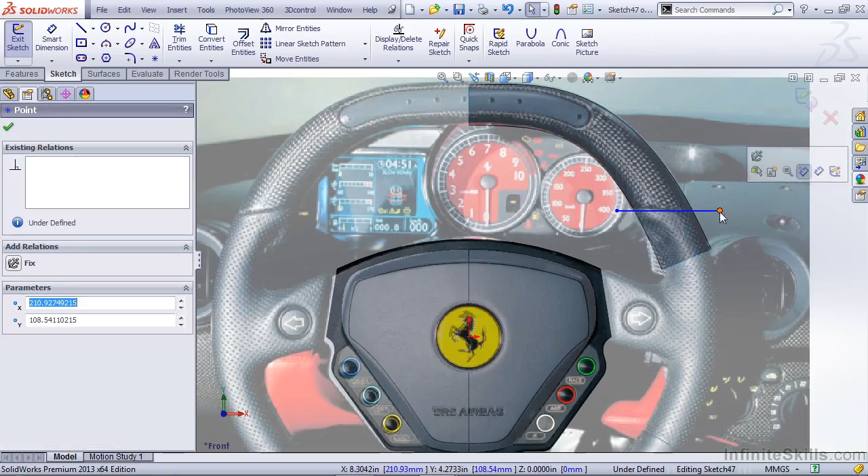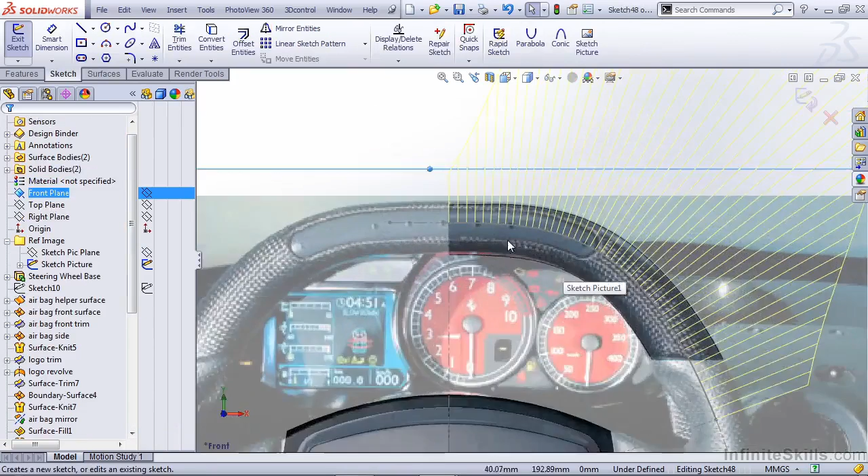Go to my Surfaces tab and use my Trim Surface to remove the excess portion of our loft that we do not need. The next thing I want to do is expand our loft and show the centerline sketch that was used to create that loft. On our front plane again, we're going to start a new sketch. What we'd like to do is create the border for our tachometer section.

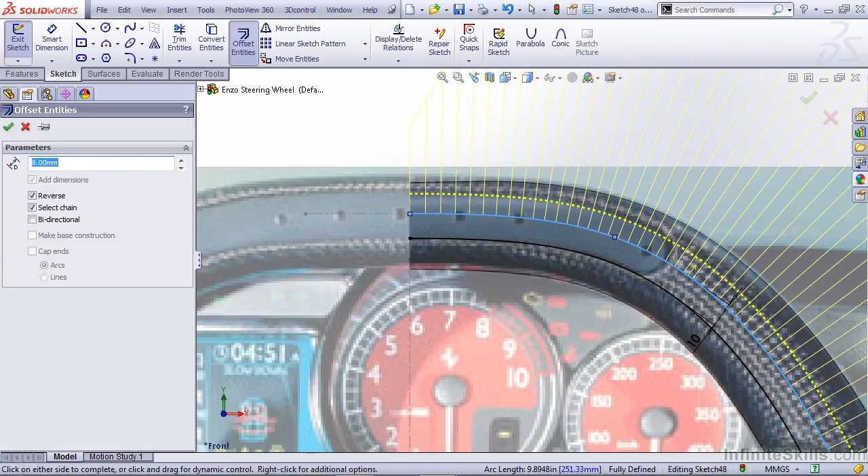I'm going to select the center line and use an offset. Looks like 10 millimeters is going to get us pretty close to where it's shown in our sketch picture. I'm going to select it again and offset it in the other direction. Now 10 millimeters is going to get us a little too close to the upper edge, so I'm actually going to use 8.

The next thing I like to do is use a straight line going between both sections, fix it in place, then use my trim tool to remove any unwanted sections. I like to use power trim. It allows me to just drag past and remove the unwanted section of our offset. Next, I want to convert that straight line to construction and then add a 3-point spline starting at each section and snapping to our centerline parameter for our loft.

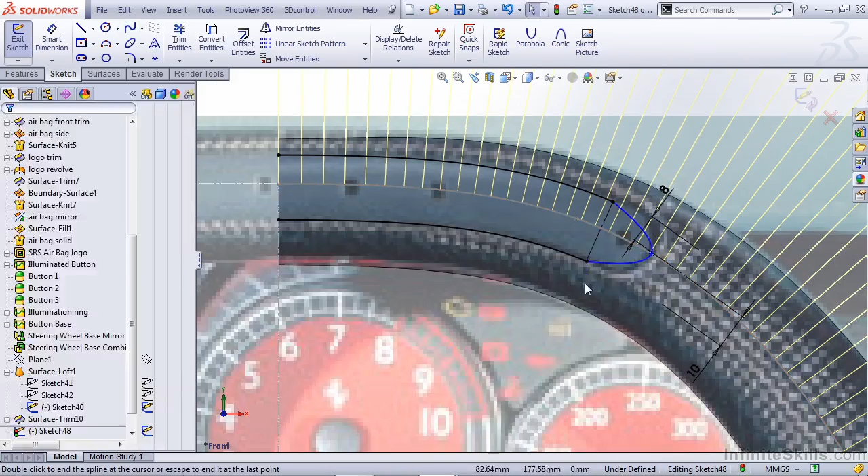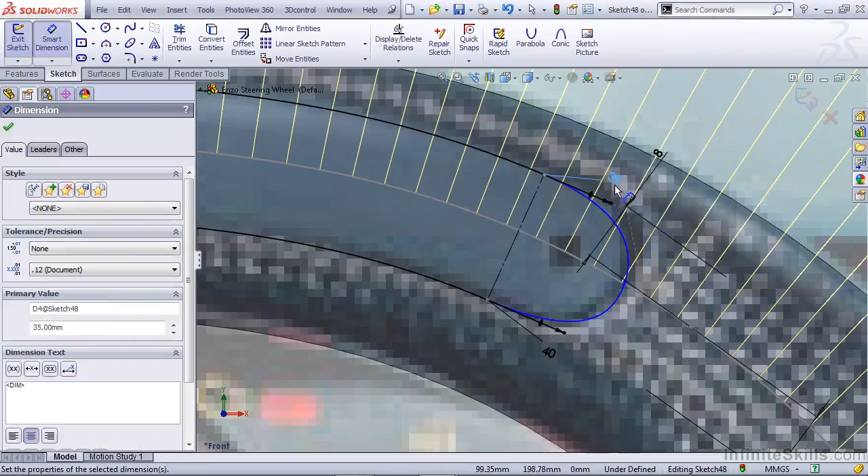We can apply a tangent relation to each side, and notice that that gets us pretty close to the shape that we see in our sketch picture. I'm simply going to drag the handles out a little bit farther and get a more rounded section on the end. Now it is important that we fully define this, so I'm going to give this a 40 millimeter dimension, we'll give this a 35 millimeter dimension, and we'll give this a location in relation to something, 15.25. That allows us to fully define this sketch.

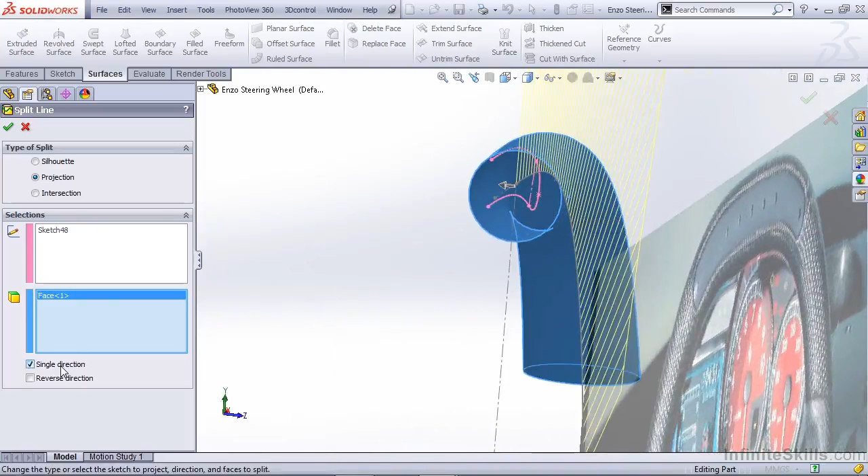We can exit, go to our curves menu, and use a split line feature. It's important to note that the front plane is actually inside of our steering wheel surface. So we want to make sure we use the single direction option and that the direction arrow is pointing the correct way. If we OK this, it's now split our steering wheel in order to create that tachometer section. Let's hide our centerline sketch and take a look at this.

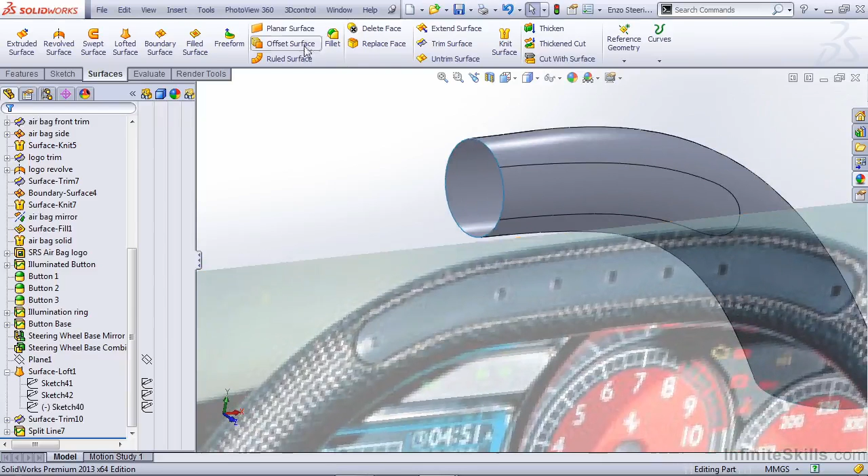When we look at the image here, we see that this tachometer section actually looks like it's depressed into the surface a little bit. So I'm going to use offset surface, grab this face, I'm going to offset it 1/4 millimeter, making sure that it's going inside the part. Then I can use delete face and remove that outside face that we created. Now we need to create a surface that goes between the two.

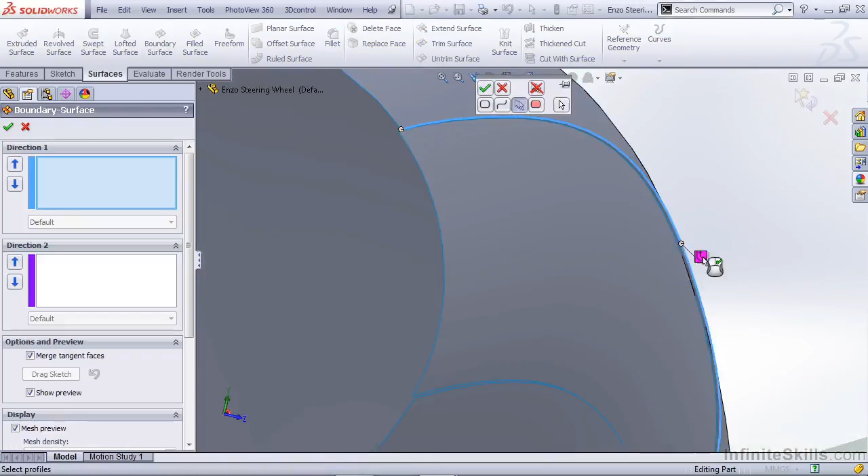We can use a boundary surface, right click and use our selection manager, making sure that we have all the tangency selected, and do the same thing for that inside edge as well. Now this allows us to create a boundary surface between the original intent and the offset. Once we knit these together, we have a single surface once again.

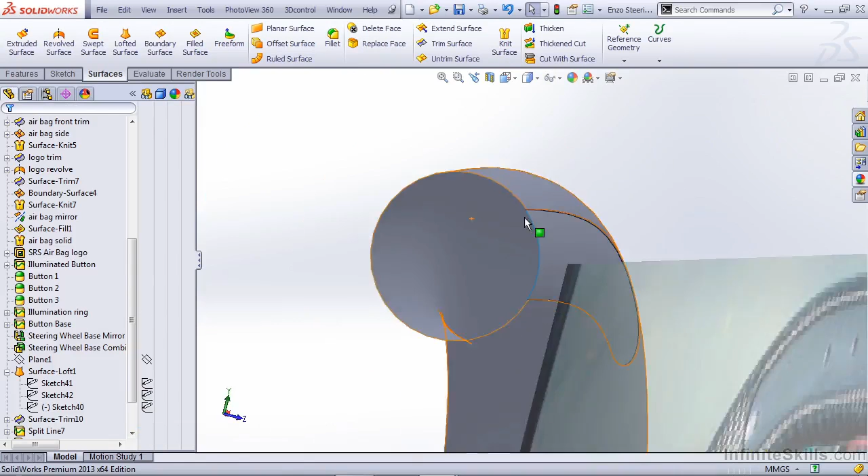From this point, I'm going to go to my Features tab, and I'm going to mirror this across my right plane. Once you've created a feature, it will automatically be selected when you go into your feature mirror. Make sure that you clear that selection and you use bodies to mirror as opposed to features. Select your right plane and select the Knit Surfaces option.

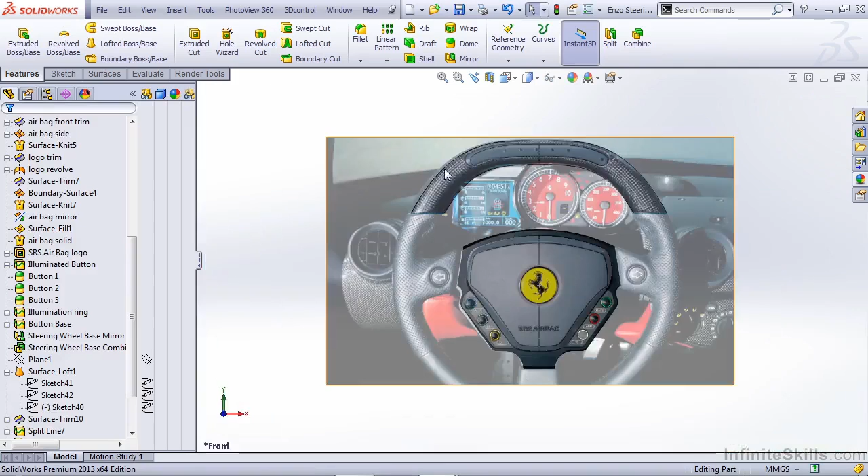You'll notice that because of the distortion in our sketch picture, it's not lining up perfectly with the left side. So we're going to assume the design intent was for this LED to be centered on the steering wheel. So we're going to create a sketch on our front plane again. Go to our loft operation and again make that centerline path visible. Draw a vertical construction line that will allow us to do a sketch mirror and then add a few circles.

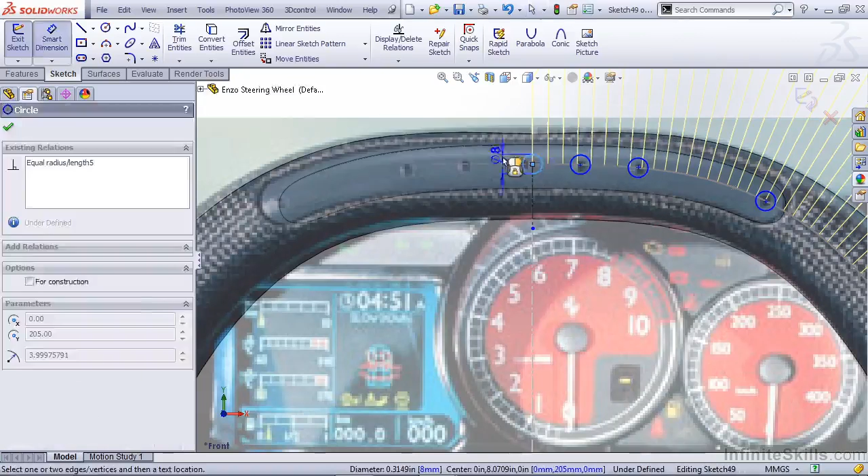We're going to snap to the center, get these as close as possible to the sketch picture, apply an equal relation between all 4 of these, give at least one of them a dimension. We're going to give it 8 millimeters. Then I'm going to fix the center point location of the remaining LEDs. Now I can use my mirror entities, mirror the outside 3, and copy them about that vertical construction line we created. You can exit the sketch, go to our curves dropdown, and use split line again.

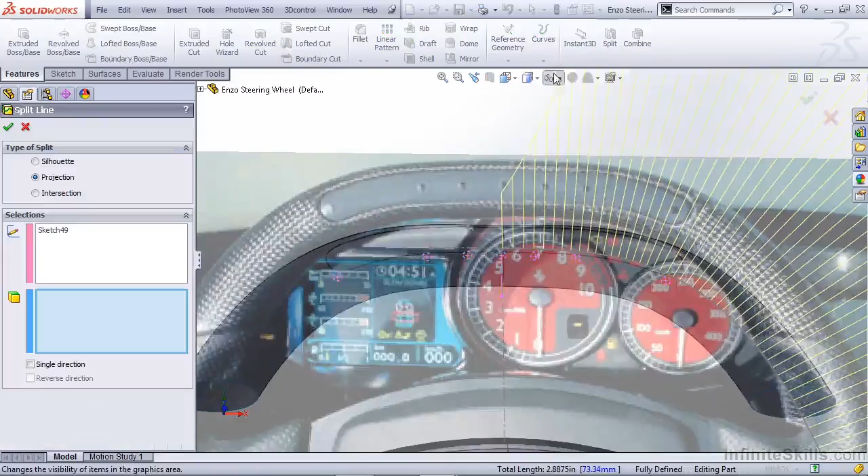Make sure that you select the faces you want to split, single direction, and make sure that it's going the correct way. You can again hide our centerline path and also hide our sketch picture and take a look at what we have here. So it's a fairly good representation, something that we can apply more materials to later and get the illumination similar to what we did for our control buttons. That concludes creating the upper steering wheel tach.